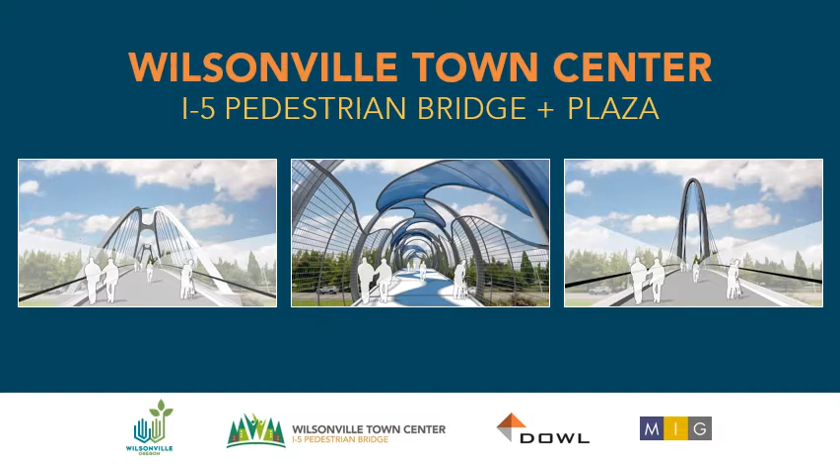The Wilsonville Town Center, I-5 Pedestrian Bridge and Plaza are two distinct projects that we'll talk about in this video. The I-5 Pedestrian Bridge will be a critical link between the east and west sides of Wilsonville for bicycles and pedestrians.

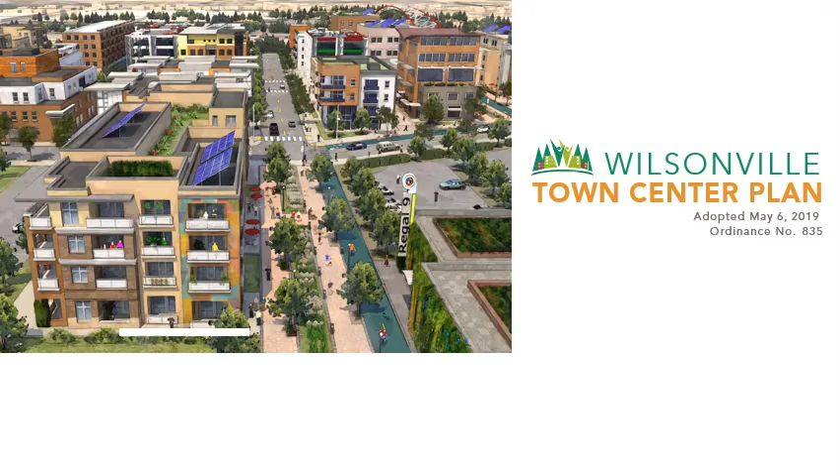The East Side Gateway Plaza was a project that was adopted as part of the Wilsonville Town Center plan and provides a critical gateway to the east side of Wilsonville and the larger Wilsonville Town Center.

The current phase of the project began back in February of 2020 with an open house and online survey where we asked Wilsonville residents and businesses about key themes and identity elements for the Bridge and Gateway Plaza. Right now we've developed several concepts which we'll be asking for your input on, with the hope of developing a recommended alternative in the fall of 2020.

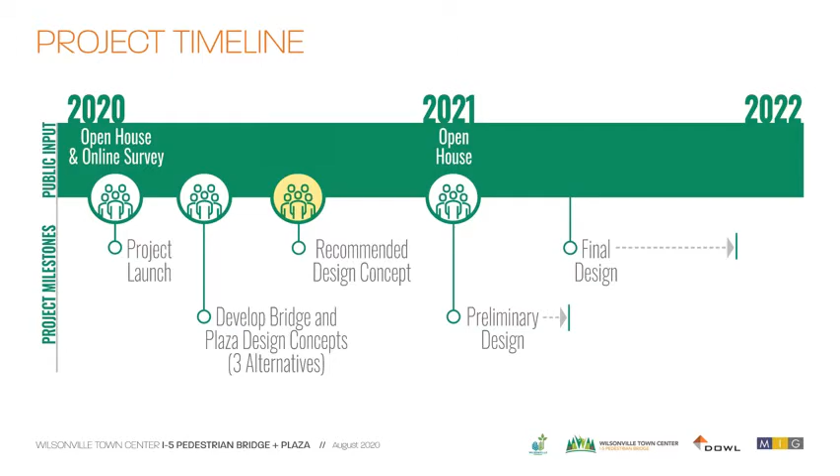Previous public engagement identified a number of prioritizing elements and themes that resonated with Wilsonville residents, such as: the bridge and plaza should integrate nature and sustainable design; the connection should support future development; the plaza should provide places to stop and rest; the plaza should incorporate art; the bridge should be an iconic structure that evokes the heart of Wilsonville. Themes that resonate, which are carried forward through the concepts we'll talk about, should be that each concept is in harmony with nature, is family friendly, evokes the Willamette River and Boone's Ferry, is inclusive and welcoming, and is active and mobile.

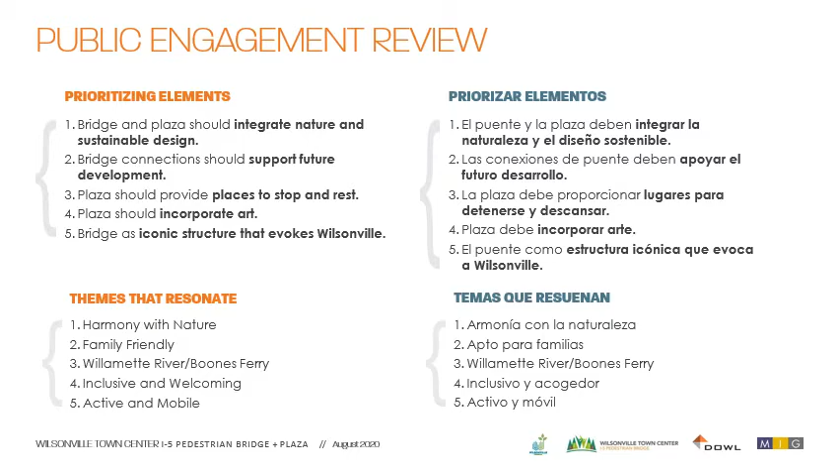The pedestrian bridge is a critical link between the east and west sides of Wilsonville for bicycles and pedestrians, connecting the commercial and future mixed-use areas of the Wilsonville Town Center to the existing transit hub and Villebois on the west side. It is also part of the larger regional trail network connection that incorporates the Coffee Lake Natural Area, Graham Oaks Nature Park, and the Ice Age Tonquin Trail.

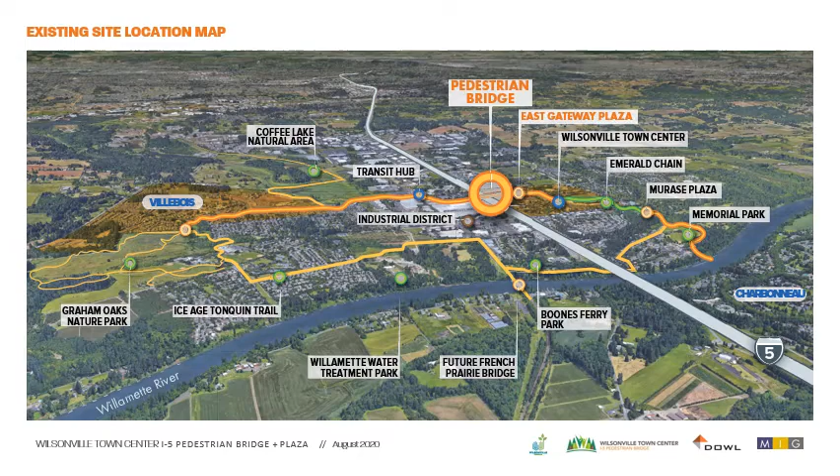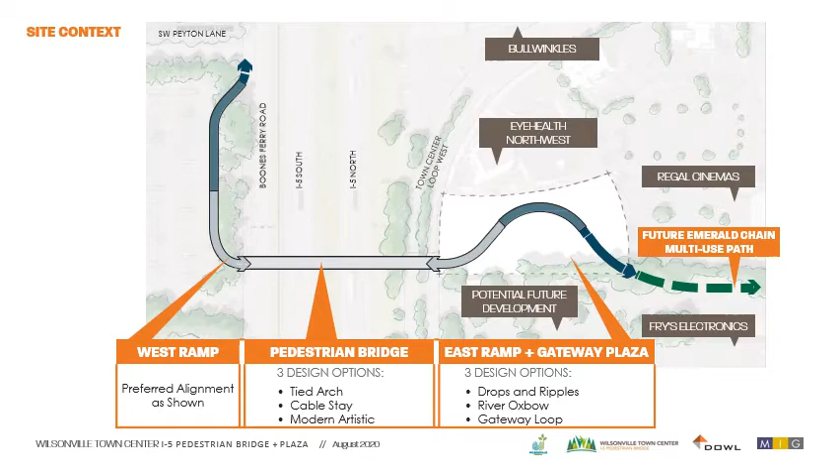There are three major elements to this project: the west ramp, the pedestrian bridge, and the east ramp and gateway plaza. We'll focus in this video on the pedestrian bridge and the east ramp.

Each bridge concept incorporates a number of bridge amenities that were identified through the previous public engagement process. It also identified which structural forms and styles the concept should incorporate. An important outcome of the public process was that there should be separated modes of travel for bicycles and pedestrians on the bridge.

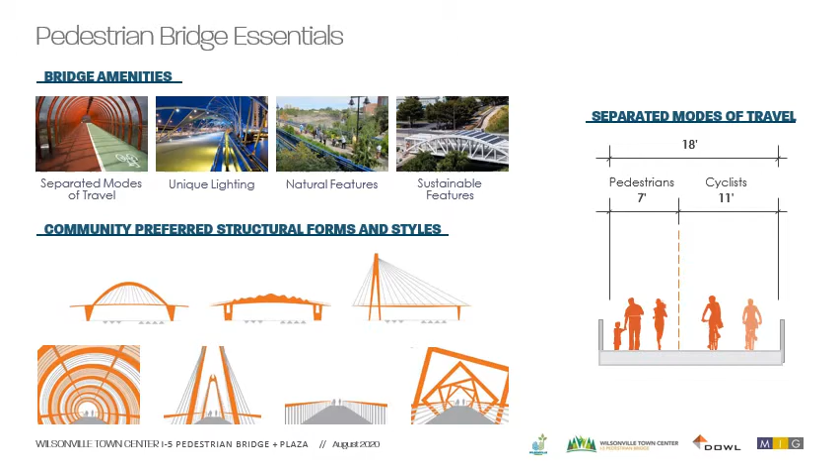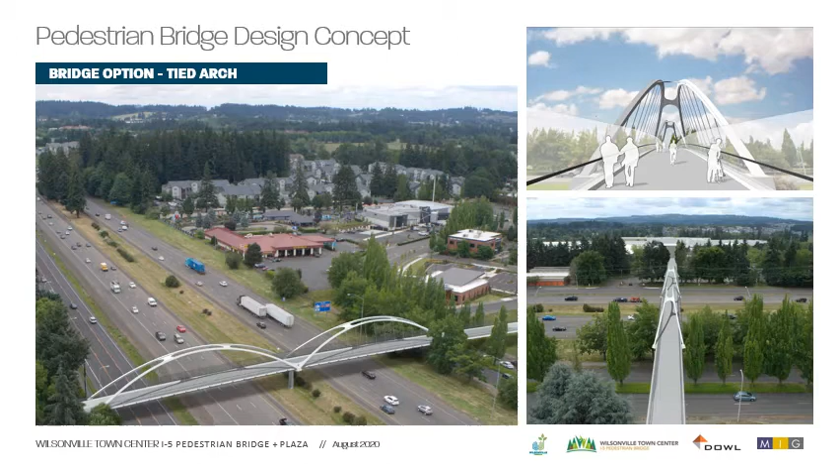Now let's talk about the three bridge concepts. Clean and elegant, the tied arch is structurally impressive. The double arch bridge provides an elegant variation to a single arch, providing a different rhythm to the crossing.

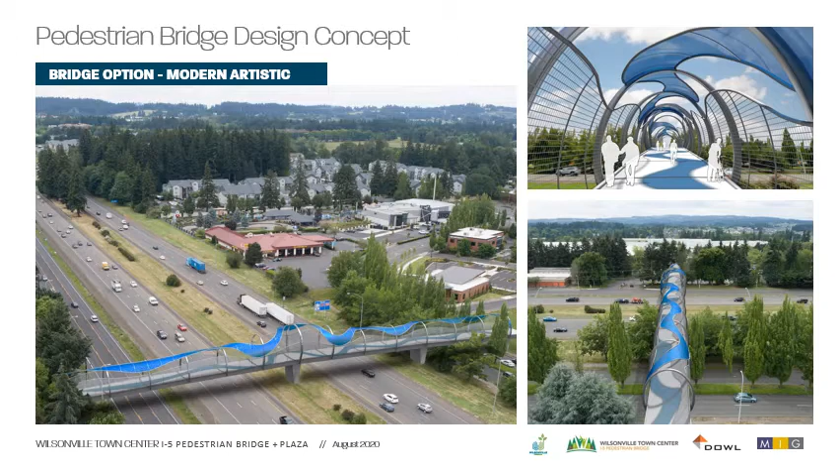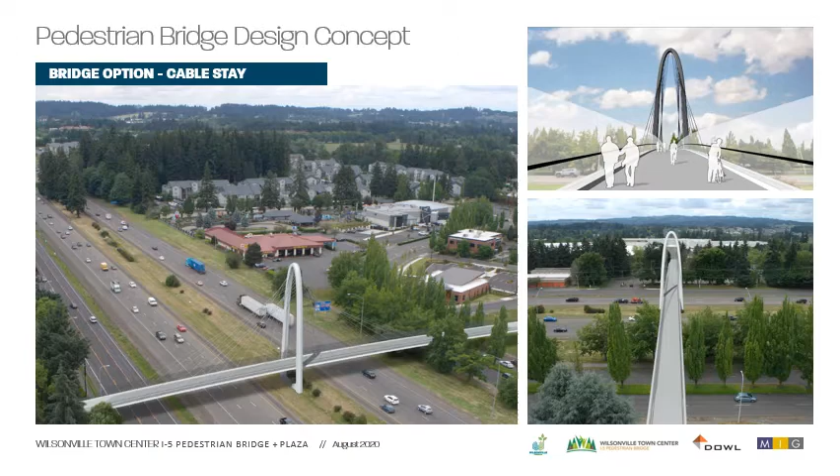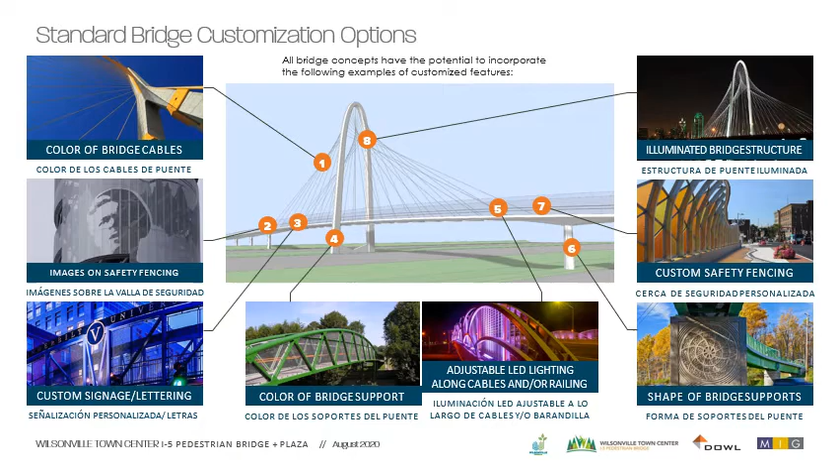There are a number of potential customization options for the future bridge. These could include the color of bridge cables, images on the safety fencing, custom signage or lettering, the color of the bridge supports, adjustable lighting, whether or not the bridge structure is illuminated, custom safety fencing, and the shape of bridge supports. Now let's talk about the East Side Gateway concepts.

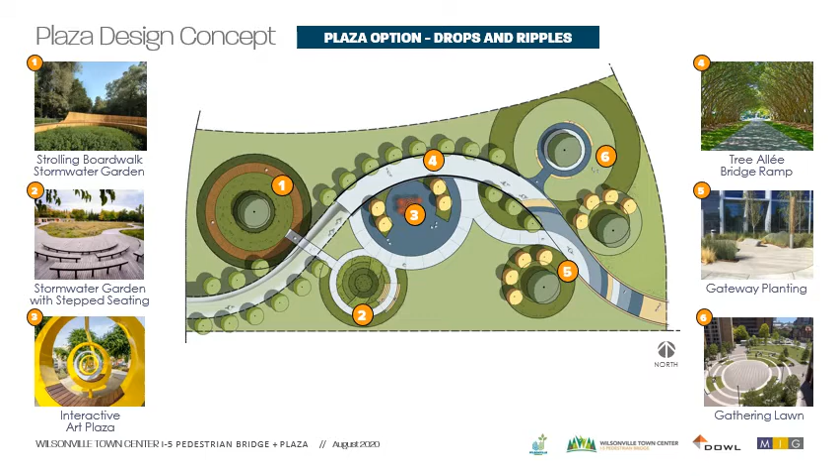Contemporary and elegant, the Drops and Ripples design concept creates a series of looping pathways and interconnected gathering spaces marked by a rise and fall in topography, concentric paving patterns, an interactive art plaza, and an open lawn to draw visitors in and create opportunities for a range of activities and gatherings.

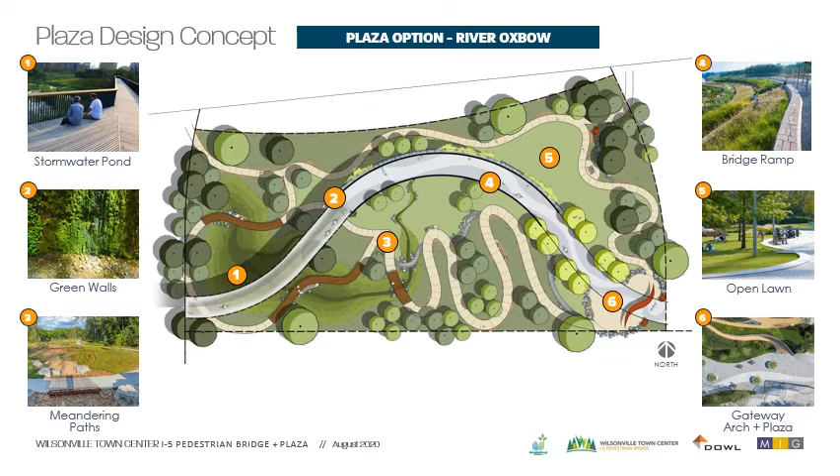Echoing the Willamette River's sinuous course, the River Oxbow design celebrates the movement of water with meandering pathways, winding paving patterns, cascading green walls, stormwater channels, and a pond.

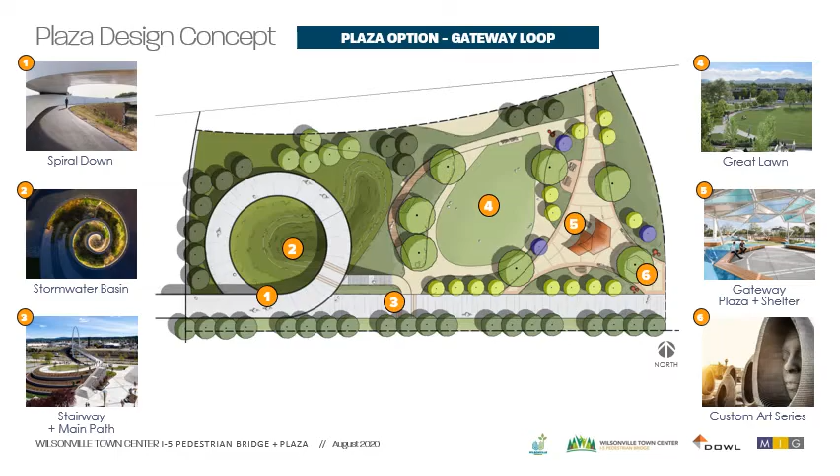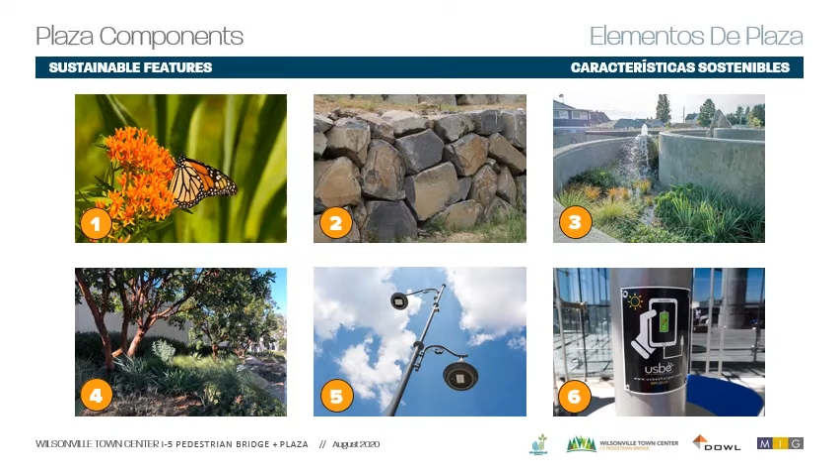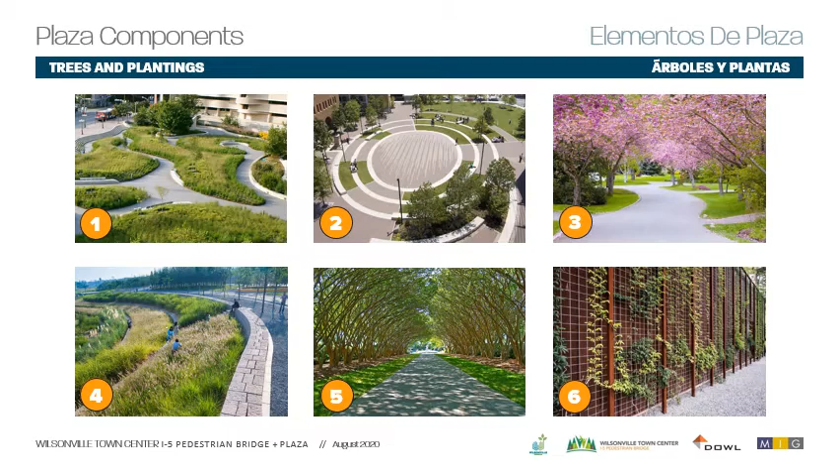Providing shelter from the elements is an important consideration as part of the gateway design. How that will be provided is still to be determined. Trees and plantings are an important part of the gateway plaza design. Whether or not that is formal or more natural is still to be determined.

Providing gathering spaces was an important outcome of the initial public engagement process. Whether that's benches, open lawns, or movable chairs are all elements still to be considered as part of the concept for the plaza.

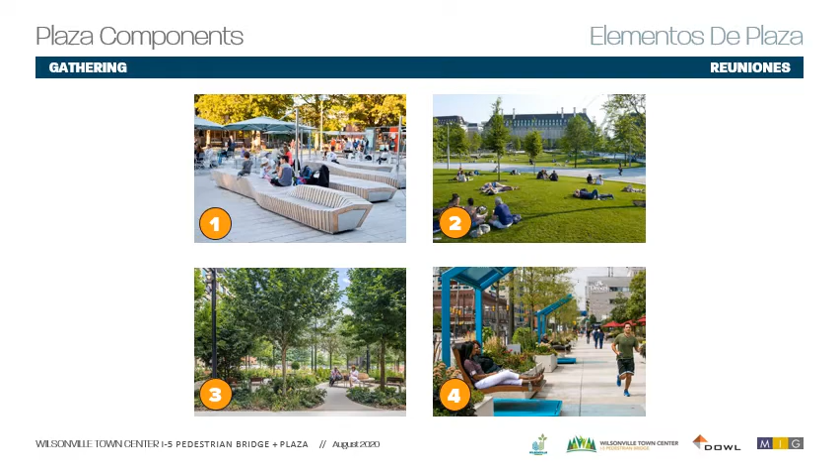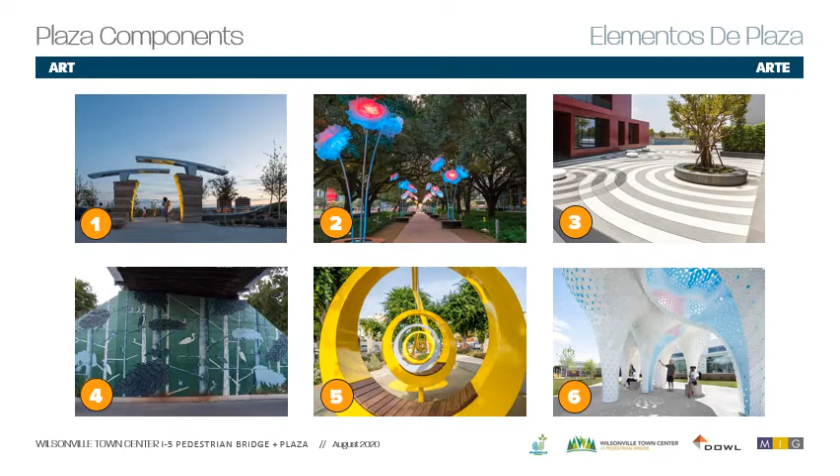And finally, public art. Wilsonville is known for its public art, and the East Side Gateway Plaza will incorporate it in some form. How that is incorporated into the design is still to be determined, but could take on a number of shapes and styles.